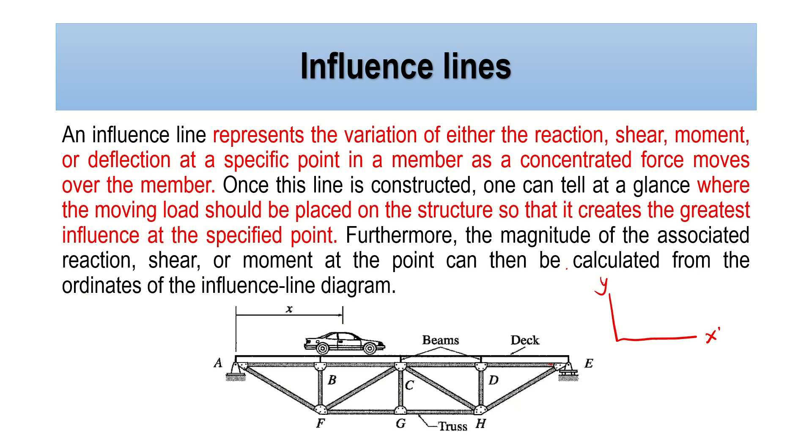Okay, so ngayon, sa influence line, ang pag-aaralan natin for this lecture is influence line for beams. Ang kukuhanin natin yung maximum reaction, shear, or moment, o influence line ng reaction, shear, and moment. And then for the influence line for trusses, influence line ng reaction, and influence line ng member forces.

Okay, so ngayon, ano ba dapat kailangan nating daanan, or what are the key principles behind influence line? Number one, in order to construct an influence line, place a one unit load at various locations to determine the reaction, shear, and moment at the desired position for the influence line.

And then number two, upward reactions are considered positive. So it means that if we have a downward reaction, that is considered negative. All influence lines for statically determinate beams will consist of straight line segments.

This is important because we can use this principle in order to determine other ordinates in our structure. Kasi since this is a straight line, ibig sabihin, kaya natin mag-produce ng similar triangle, also called ratio and proportion.

And then number four, refer to the image below for the directional sign convention for shear and moment when utilizing method of section. Ibig sabihin, kapag nag-method of section ka, kinat mo yung beam, kinonsider mo yung left side, your moment should be counterclockwise and then your shear ay downward. Kapag nag-cut ka naman, kinonsider mo yung right side, your moment should be clockwise and then your shear should be upward. Okay, so yun lang po yung principle.

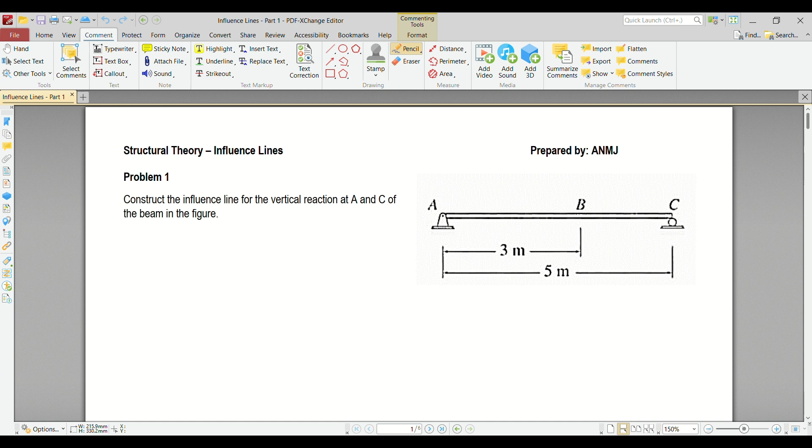First thing we need to do is, again, based on the concept presented earlier, we need to place a one unit load at various locations of the beam. Since meron nang mga point na nakalagay dito sa aking beam, doon na lang tayo maglalagay ng point, but you can cut the beam in different segments that you want. Okay, so ngayon, ang pinapahanap is reaction ng A tsaka reaction ng C. So ngayon, i-project lang natin yung different reaction nila. So we have here RA.

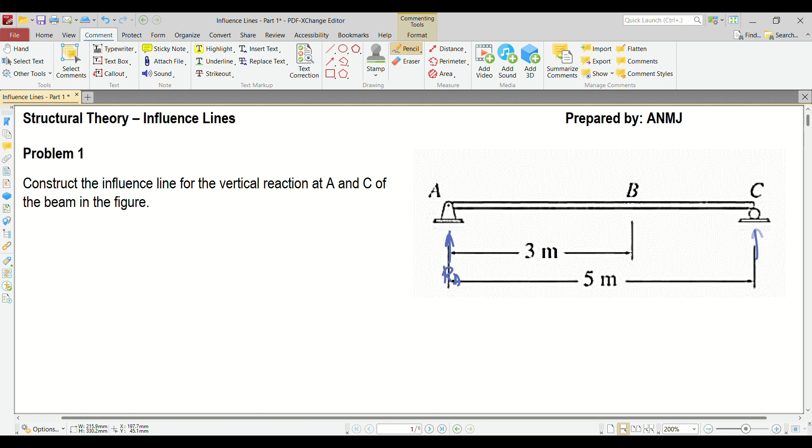And then, we also have here RC. So now, how do we solve this problem? So again, place one unit load at various locations. So let's say ito yung one unit load natin. Again, yung one unit load natin ay hindi stationary. Ito ay nagmo-move at various locations.

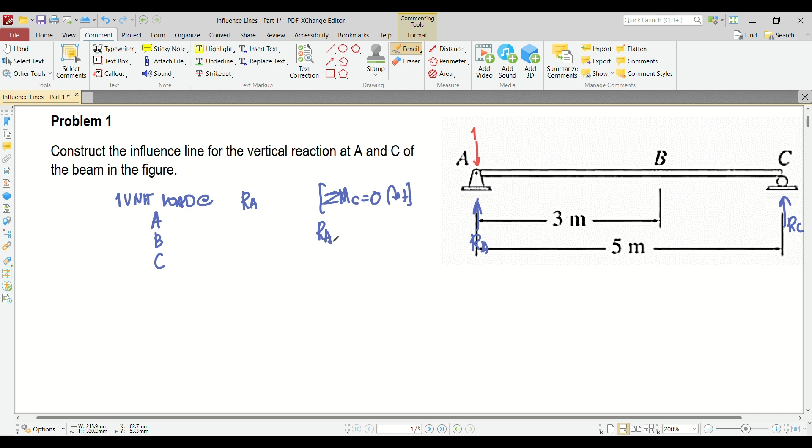So, basically, para makuha natin yung reaction sa A, pwede tayo mag-moment. So, summation moment sa C equals 0, clockwise positive. So, therefore, what will happen? So, we have RA, that is clockwise, so that is positive. The distance is 5. And then minus, kasi ito counterclockwise, 1 multiplied by 5 also equals 0. If you notice, yung RA natin is just equal to 1.0.

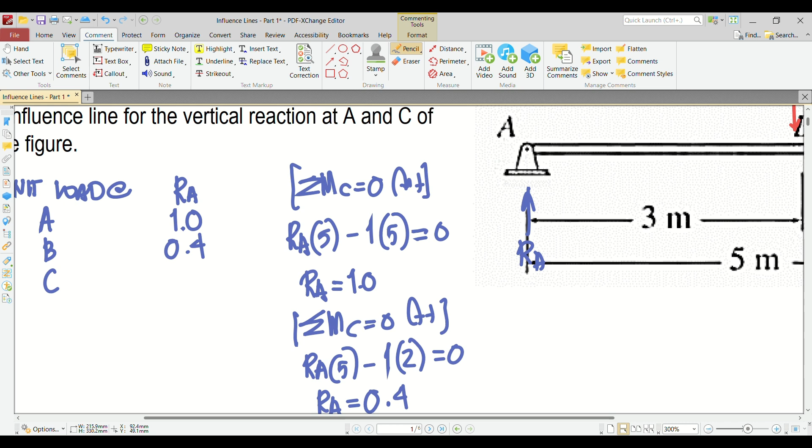Now, again, i-move natin yung 1 unit load, i-place natin sa point C. If the 1 unit load is placed at point C, what will be my reaction? Again, to determine the reaction, you can take the moment at point C. Summation moment sa C equals 0, clockwise positive. So, this is RA multiplied by 5, and then minus 1. Since we don't have any perpendicular distance from the 1 unit load to point C, kasi nasa point C na yung loading, our distance here should be equal to 0. So, RA should also be equivalent to 0.

So, ang influence line natin is yung mga ordinate 1.0, 0.4, and 0. So, using this, we can now create an influence line. Remember, the influence line for statically determinate beams consists of straight line segments. So, if we draw the influence line for reaction sa A, paano natin gagawin yan? First, let me draw the beam.

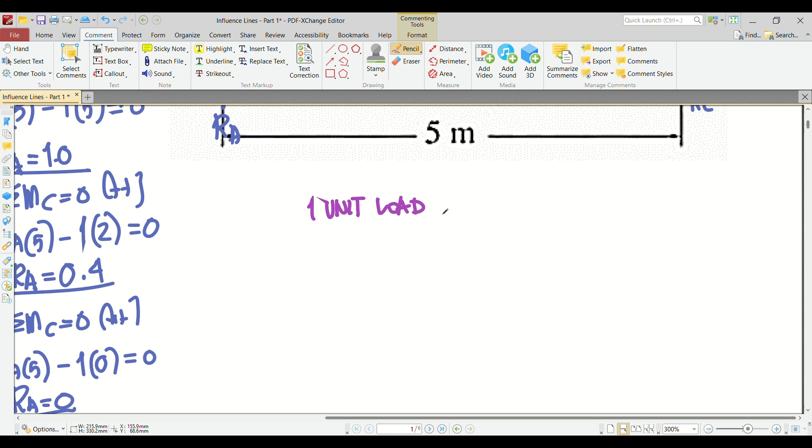Summation moment sa A equals 0, clockwise positive. So, therefore, what will happen? We have negative RC. If the 1 unit load is placed at point A, negative RC multiplied by 5, plus 1, but you don't have any distance kasi yung 1 unit load mo naka-place sa point A. So this is 0 equals 0. Zero divided by any number is equal to 0. So yung unang ordinate natin is 0.

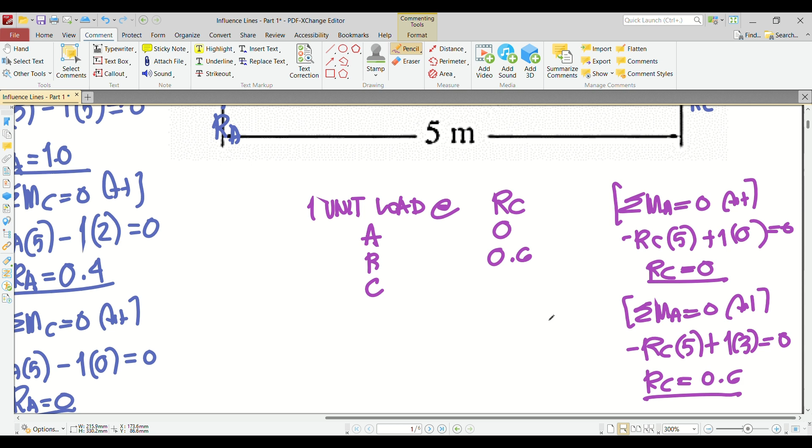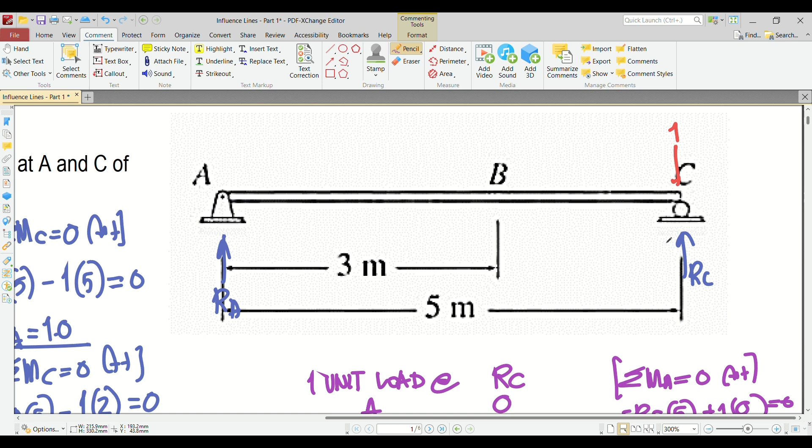Isin natin. 0.6. Now, if the 1 unit load is placed at point C, lagay natin. Ano na ngayon yung reaction ko sa C? So, ganun lang ulit. Summation moment sa A equals 0, clockwise, positive. So, therefore, this is negative RC times 5 plus 1 times 5. Bakit 5 na to? Bakit hindi na 3? Kasi nga, yung 1 unit load mo nasa point C na, which has 5 meter distance from point A. Kasi sa point A ka nagmo-moment. So, therefore, yung RC natin should be equivalent to 1.0. So, 1.0 pala ito.

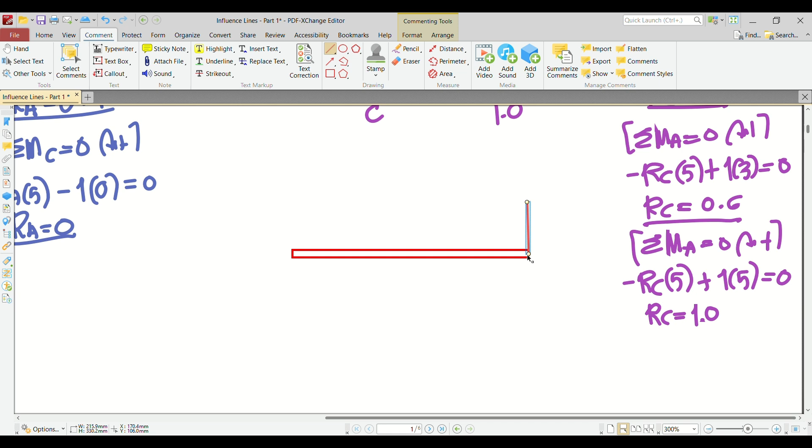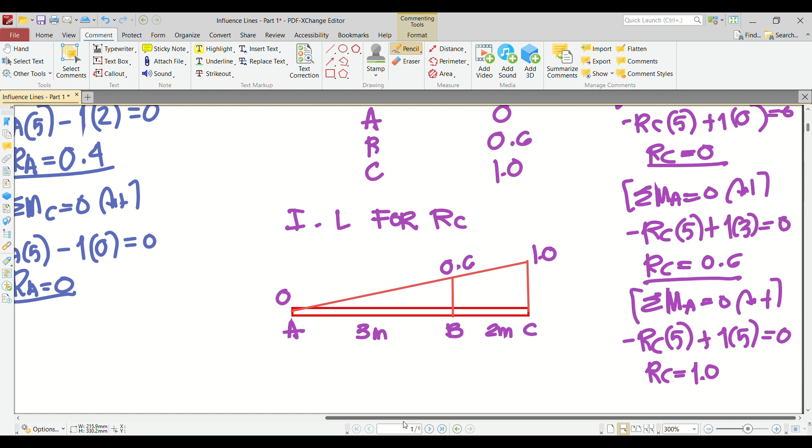Okay, so we can now create an influence line. So again, influence line consists of straight line segments. Kaya madali. So, drawing ko lang. Okay, so lagyan natin ng mga letters. So this is the influence line for reaction at C. So this is point A, this is point B, this is point C. The ordinate for this one is 1.0 based on our table here. And then sa B, this is 0.6 and then this is 0. So pwede naman natin lagyan ng horizontal distances. So ito ay 3 meters, ito ay 2 meters. So sa kabila din, lagyan natin 3 meters, ito ay 2 meters.

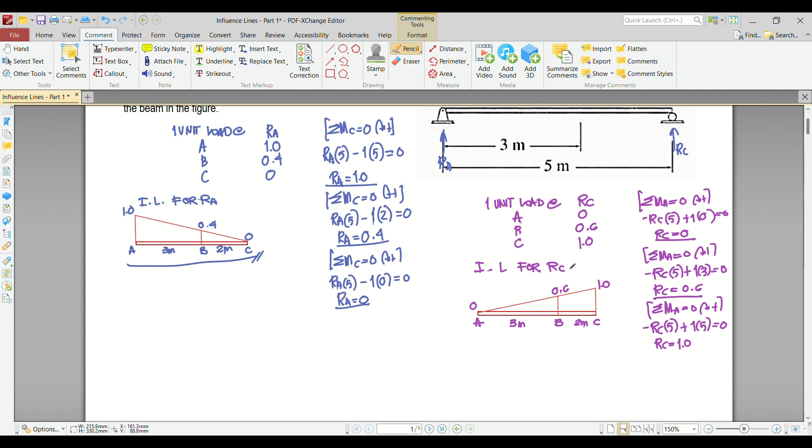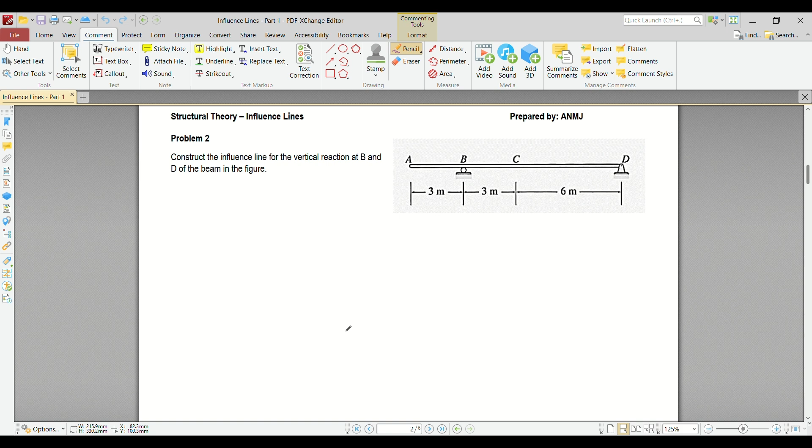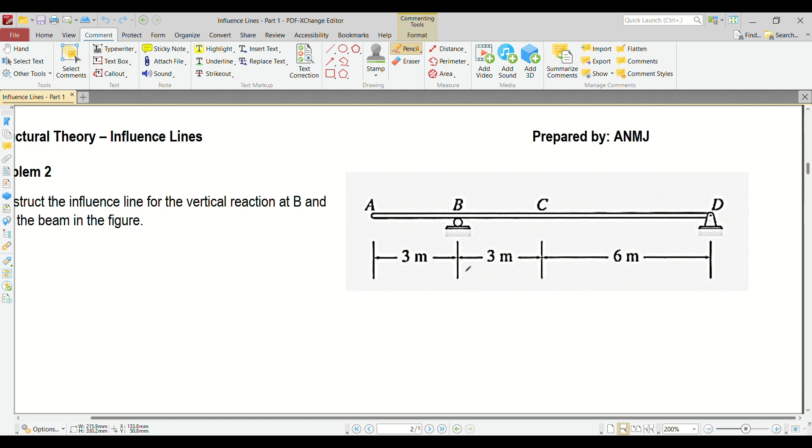So that's how you draw influence line based on the 1 unit load placement. Medyo mahaba lang but we do have shortcut for that, but that is for a different video. Okay, so let's try to answer problem number 2. Construct the influence line for the vertical reaction at B and D of the beam in the figure. So we have an overhanging beam. For this one, I will not place the 1 unit load at different places. This is just a representation. Alam nyo na dapat ilagay yung 1 unit load sa different placement. Again, this is just a representation that the 1 unit load is moving to the right.

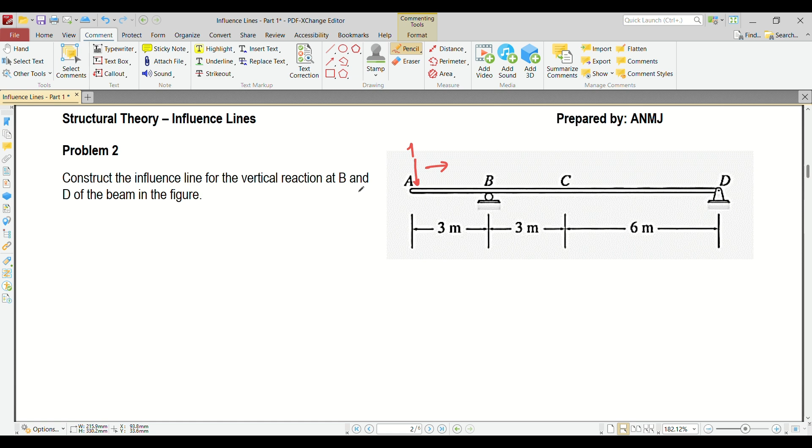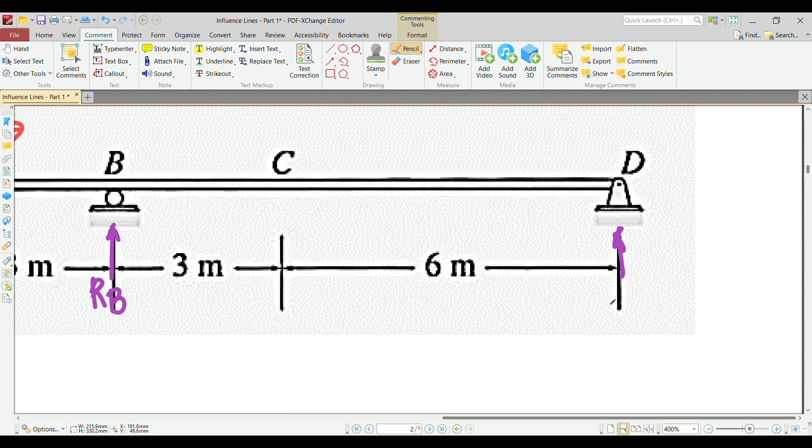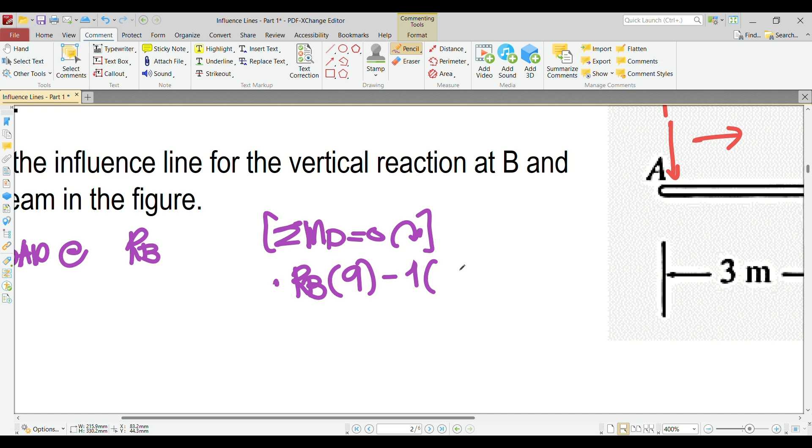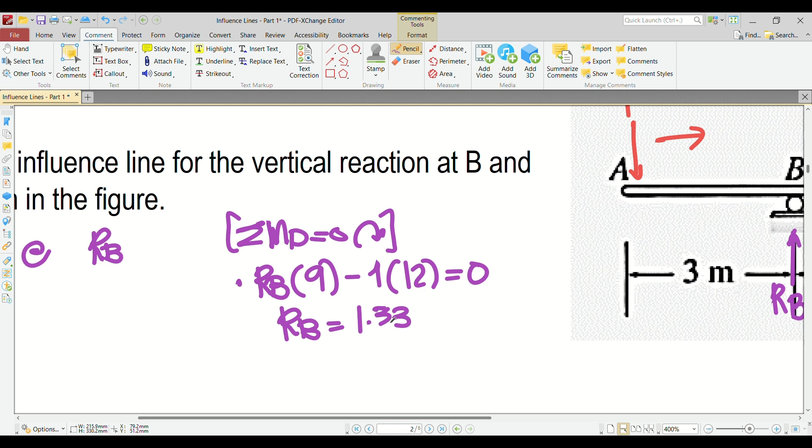So ngayon, na pinapahanap is reaction sa B tsaka reaction sa D. So let's write the representation of those reactions. So we have here RB, and then we have here RD. Gawa tayong table. A, B, C, and D. Unahin na natin si RB. Para makuha natin si RB, summation moment sa D equals 0. Remember, magsa-summation moment ka lang kung nasan yung support, at point B and D. So if the 1 unit load is placed at point A, tapos nag-moment ka sa D, we have RB, positive kasi clockwise, multiplied by 9, minus 1 multiplied by 12, equals 0. So yung RB natin should be equivalent to 1.33 or 4 over 3.

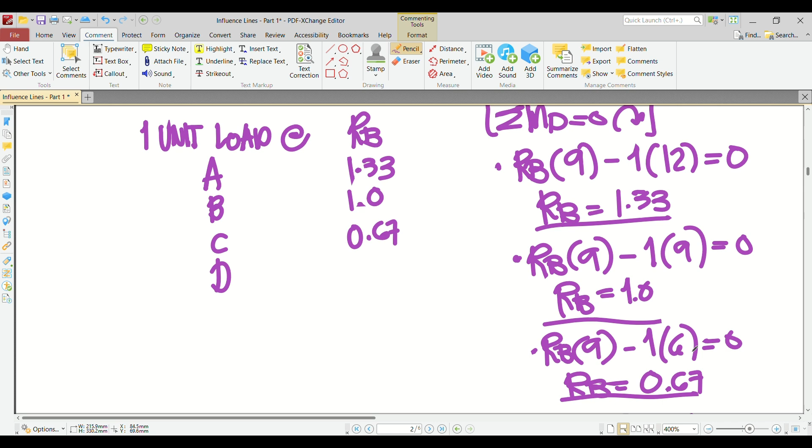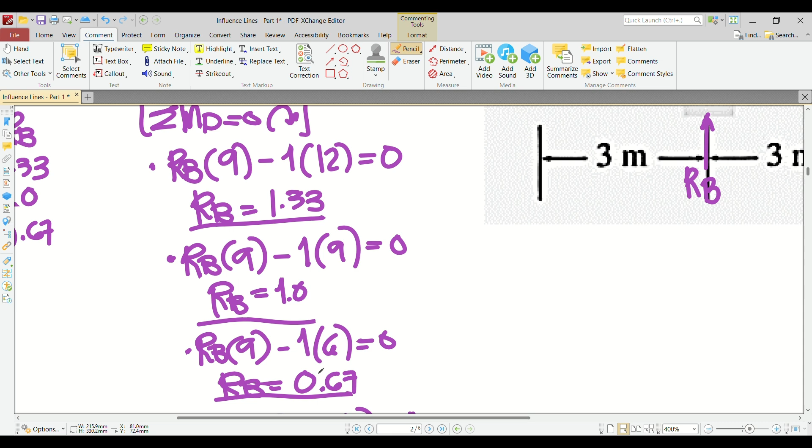Ngayon yung 1 unit load natin nasa point B na. RB times 9 minus 1 times 9 equals 0. So RB is 1.0. Next, yung 1 unit load natin nasa point C na, and ang distance ng point C from point D is 6 meters. So RB times 9 minus 1 times 6 equals 0. So RB should be equivalent to 2 over 3 or 0.67. And if the 1 unit load is placed at point D, RB times 9 minus 1 times 0, since walang distance, equals 0. So RB is 0.

So ngayon, anong next step? Next step is we need to draw the influence line for RB. Drawing ko lang.

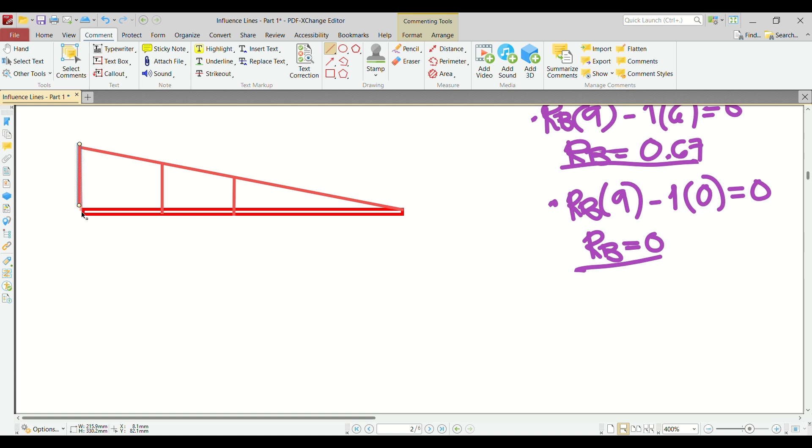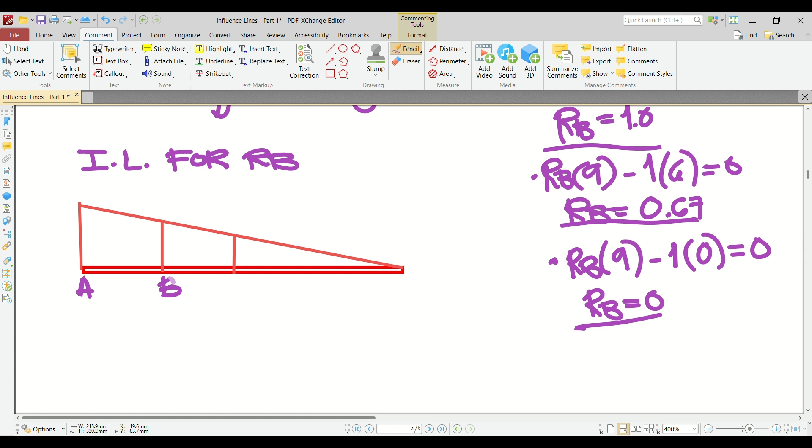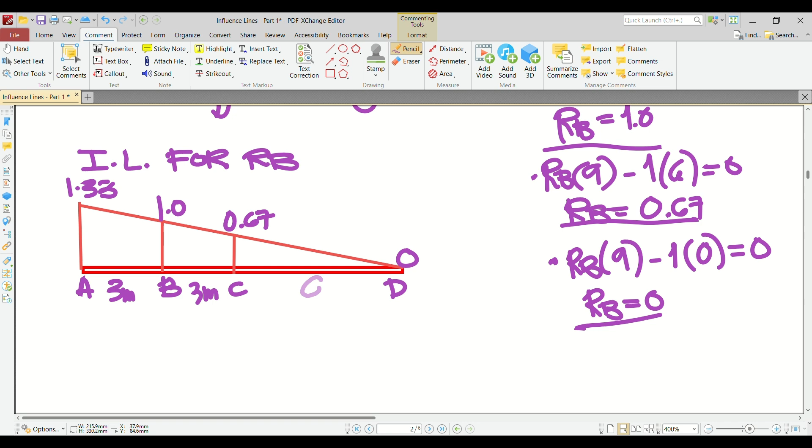Okay? So this is the influence line for the reaction at B. Okay? So this is point A, point B, point C, and then point D. So the ordinate for this one is 1.33 or 4/3. This one is 1.0. This one is 0.67 or 2/3. And then this one is 0. Okay? So let's write the horizontal distances. This is 3 meters, 3 meters, and then 6 meters. Okay? So that's how we draw the influence line with regards to the reaction at B.

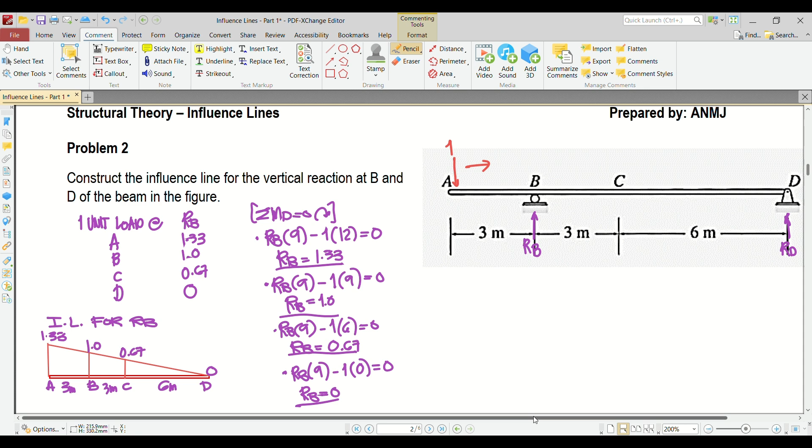Okay? So ngayon, let's try to solve the reaction at D. So ganun pa din. So lagyan lang natin ng 1 unit load. Point A, B, C, and D. Tapos hinahanap naman natin yung RD. Now, to determine the RD, so kailangan mag-moment sa B equal 0. Clockwise, positive. So, if the 1 unit load is placed at point A, tapos hinahanap mo si RD, so let's try to figure out.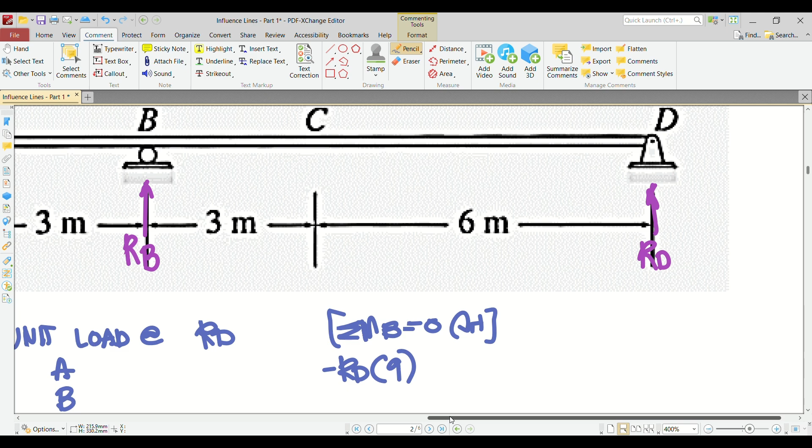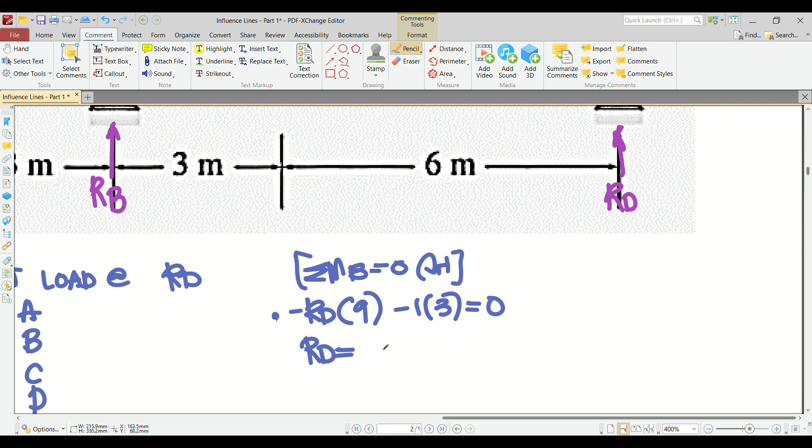So, paano yan? So, ngayon, yung movement ng RD natin is negative. The negative RD, bakit negative? Kasi moving counterclockwise siya from point B, no? So, negative RD times 9. And then, yung movement din ng 1 unit load natin, since it is placed at point A, so moving counterclockwise din siya sa point B. So therefore, minus din ito, minus 1 times 3 equals 0. So yung RD natin should be equivalent to negative 1/3. Okay? So yan muna.

Okay, another one. If the 1 unit load is placed at point B, so ano mangyayari? So negative RD times 9. Since it doesn't have any perpendicular distance kasi nagmo-moment ka sa B. So by the way, this is negative 1/3, no? Or 0.33 na lang. Since nagmo-moment ka sa B, tas yung 1 unit load mo nasa point B, so wala kang perpendicular distance. So ito ay 0. So RD is equivalent to 0. Okay?

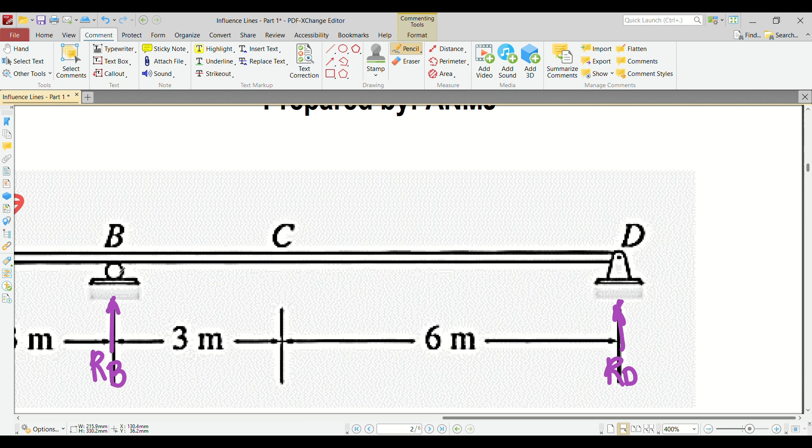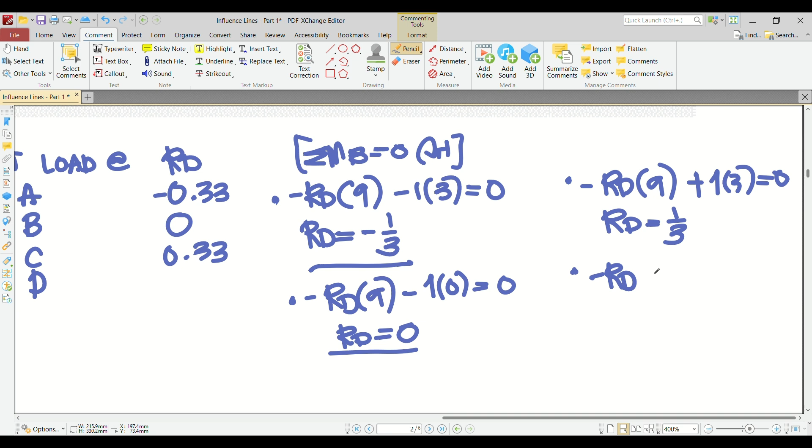Ngayon, another one, if the 1 unit load is placed at point C, so negative RD ulit, ito naman hindi nagbabago, no? And then, plus ka na ngayon. Bakit plus? Kasi this now is moving clockwise from point B. And it has a distance of 3. So 1 times 3 equals 0. So yung RD natin should be equivalent to 1/3 or 0.33. And then finally, if the 1 unit load is placed at point D, so negative RD times 9 plus 1 times 9 equals 0. So yung RD natin should be equivalent to 1. Okay?

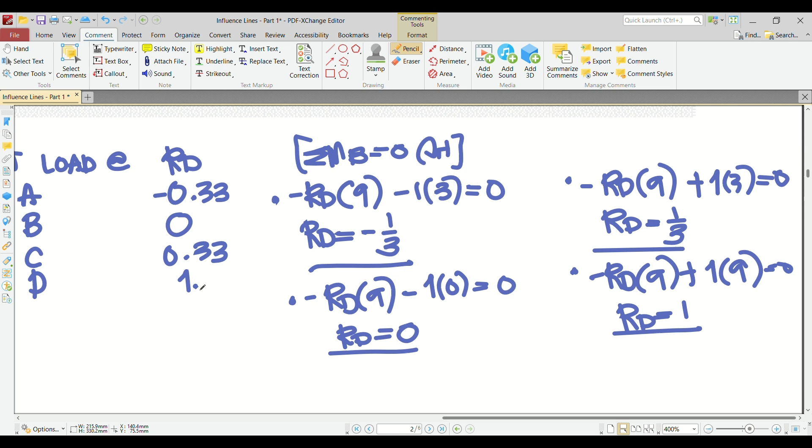So ngayon, let's draw the influence line. So this is the influence line for the reaction at D. Okay?

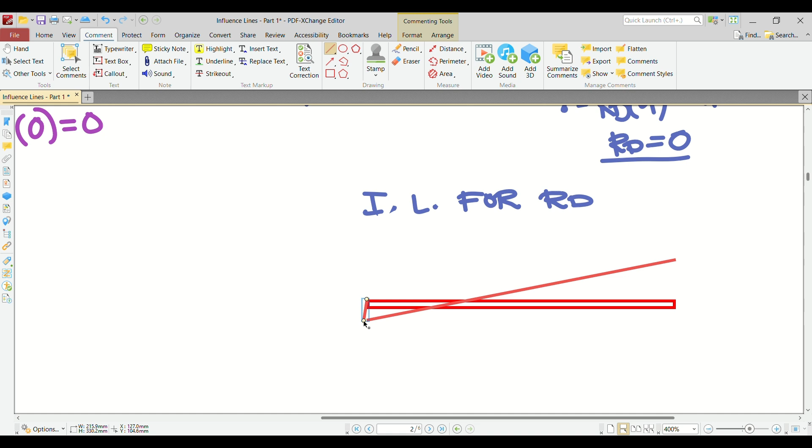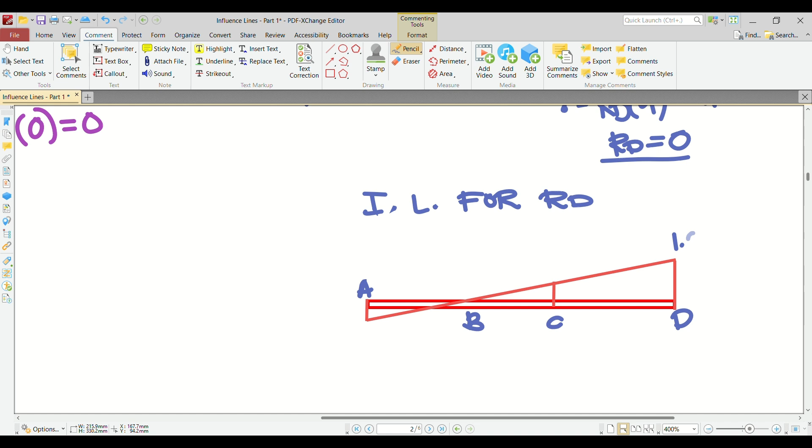Okay, so let's label the letters. So we have here point A, point B, point C, and then point D. So let's write the ordinates. So this is 1.0, this is 0.33 or 1/3. This is negative 0.33, and then this is 0. So horizontal distances, 3 meters, this is 3 meters, this is 6 meters. So this is already your answer for the influence line for the reaction at D. Okay? So that's how we answer problem number 2.

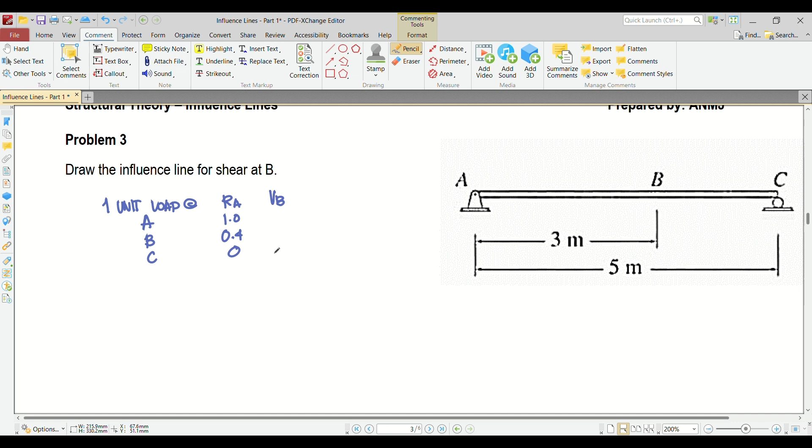Okay, so let's try to answer problem number 3. So it says here that we need to draw the influence line for shear at B. So ang gagawin natin, in order for us to determine the influence line for shear at B, kailangan natin ng reaction sa A kasi kailangan natin mag-cut sa point B in order to determine the shear. You can consider left side or right side, but for this one, I just consider the left side para medyo mas familiar tayo, no? Okay? So, again, I already incorporated the 1 unit load and the reaction at A. This is based on the ones that we solved earlier, no?

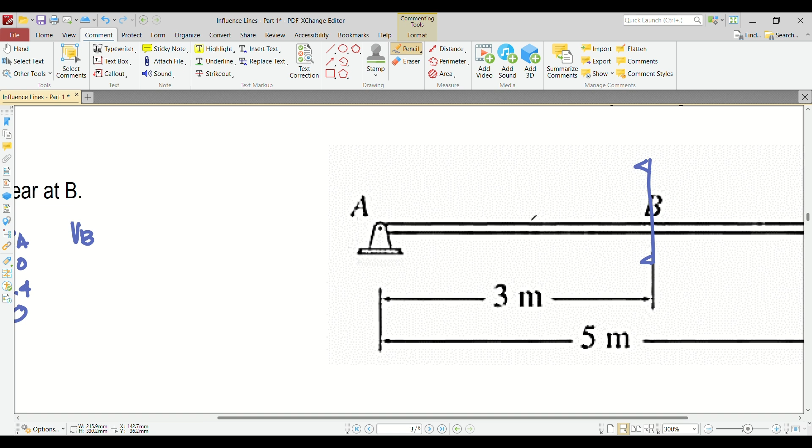Okay? So, ang gagawin ko, ika-cut natin, no? Cut ko dito, tapos consider natin yung left side. Kapag consider natin yung left side, ganito makikita natin, no? Okay. So, ang sabi natin, kapag nag-cut ka, tapos kinonsider mo yung left side, the direction of your shear should be downward. Okay? So, yan yung ating shear, no? So, ngayon, meron tayong pin dito that contains the reaction at point A. Okay? So, tapos, maglalagay tayong 1 unit load. Remember, this 1 unit load is moving. It is not stationary, no? Yan yung influence line natin or pag-create ng influence line natin.

Okay? So, the distance here is 3 meters. So, lagay ko lang, meters. Okay, so let's try to solve. So ngayon, if the 1 unit load is placed at point A, so ibig sabihin yung 1 unit load mo nandito. So lagay ko lang pero buuin ko rin. Again, it is just a representation. So what is your value for the shear at point B? So ngayon, summation forces vertical lang yan. Or, in my case, ang ginagawa ko, kapag opposite doon sa direction ng VB ko, so remember, ang direction nito downward. Kapag opposite sa direction nito, positive. Kapag same direction, negative.

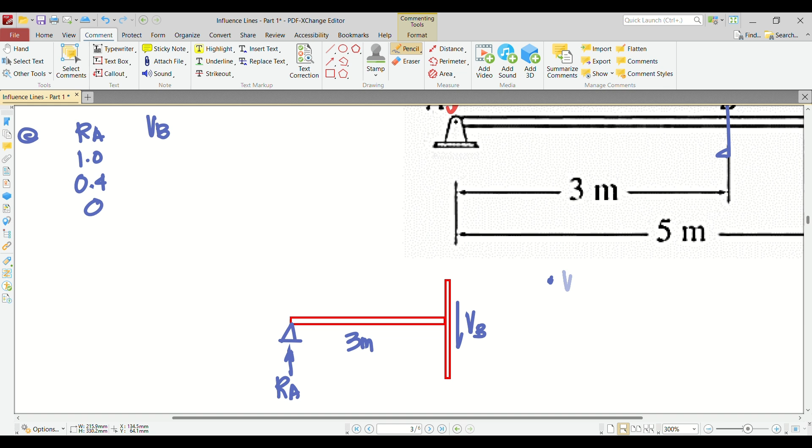Okay, ang opposite direction is yung RA. So bali magiging 1.0, again based on the reaction at A ito ha. Based on the reaction at A, and then minus 1.0 based on 1 unit load. Okay? So ngayon, yan lang naman yung dalawang force present if we cut the beam and then consider the left side. So ngayon, ang VB ko should be equivalent to 0 dahil doon sa dalawang to. Kasi 1 minus 1 is equals to 0. So yung VB ko pala dito is 0.

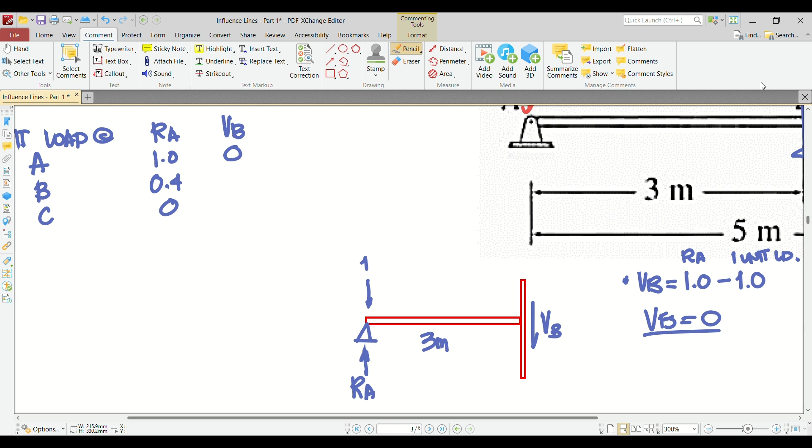Okay? Ngayon, if the 1 unit load is placed at point B, so remember, this is point A, ha? This is point B. So nandito na yung 1 unit load natin. So burahin ko lang. Nandito. Ngayon, kapag nandyan yung 1 unit load mo, may dalawa kang senaryo. So meron kang VB left, tsaka VB right. So paano ba yan? Anong ibig sabihin ng VB left, tsaka VB right? So ganito kasi, kunyari ito yung point B mo. So gawa tayong isang maliit na point. So nandito yung point B mo.

Tapos, if the 1 unit load is placed to the left of point B, ibig sabihin kapag nag-cut ka sa point B, i-consider mo pa yung 1 unit load. It's just to the left eh. VB left ang ino-consider mo eh. Ngayon, if the 1 unit load is lumagpas na ng konting-konti lang, no? It is just to the right of point B. You will not consider the 1 unit load anymore. Kasi lagpas na. Dito ka nag-cut eh. Lagpas na sa point B. So, you will not consider that anymore. Okay? So, ito, based on VB left, ito, based on VB right. Dalawang calculation gagawin mo dyan.

Okay? So, let's try. So, ngayon, again, opposite direction positive, same direction negative. Considering VB left, again, meron kang RA. Remember, if the 1 unit load is placed at point B, your reaction now is 0.4. So, bali mangyayari, 0.4. So, that's positive kasi opposite direction, minus 1.0. Remember, you need to include the 1.0 pa kasi nga, it's just to the left of point B. Okay? So, yung VB left natin should be equivalent to negative 0.6. Ngayon, paano naman yung VB right?

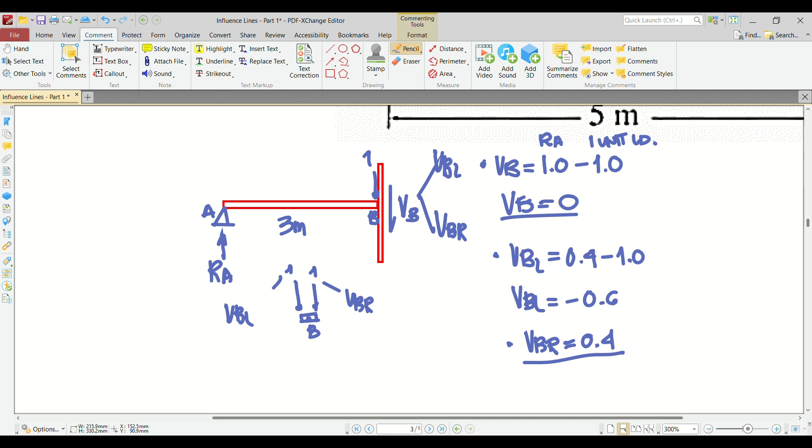O, lagay natin, VB right is equals to, so remember, opposite direction pa din si RA. So, lagay pa rin natin, 0.4. Now, we will not consider anymore the 1.0 since it is just to the right of point B. Kapag nag-cut ka, nasa right ng point B, hindi na yan kasama. Okay? So, the ordinate for VB right is 0.4. So, kapag nilagay natin yan dito, dalawa din. So, that is negative 0.6, considering VB left. Ito, positive 0.4. Dapat pag pinag-add mo yan, lagi yan equal to 1.

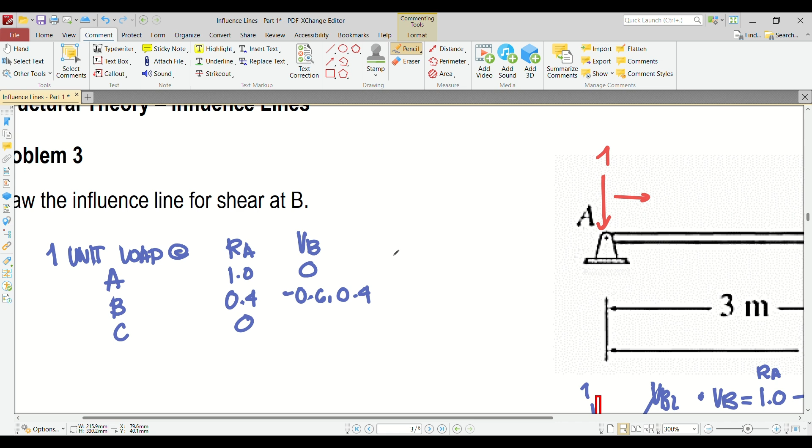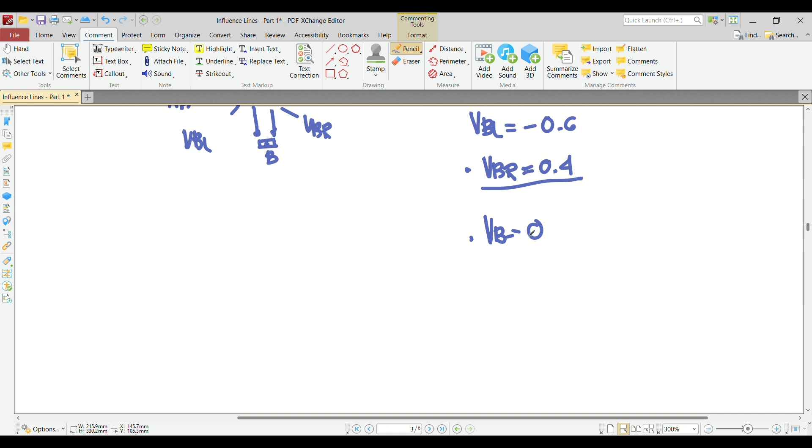Okay? So, ngayon, if the 1 unit load naman is placed at point C, so remember, our reaction is 0. So, therefore, kung wala tayong reaction, edi wala din tayong force. So, yung VB natin should be equivalent to 0. Okay? So, 0 pala ito. So, ngayon, ano next step natin? Next step is we need to draw the influence line. So, influence line for shear at B. So, let me draw first the beam. So, mangyayari, negative 0.6.

So this is 5 meters. This is, I think, this is 3 meters. This is 2 meters. This is point A, point B, and point C. This is negative 0.6. This is 0.4. And then, of course, these two are 0. So this is now your influence line for the shear at point B. Okay? So that's how we solve problem number 3.

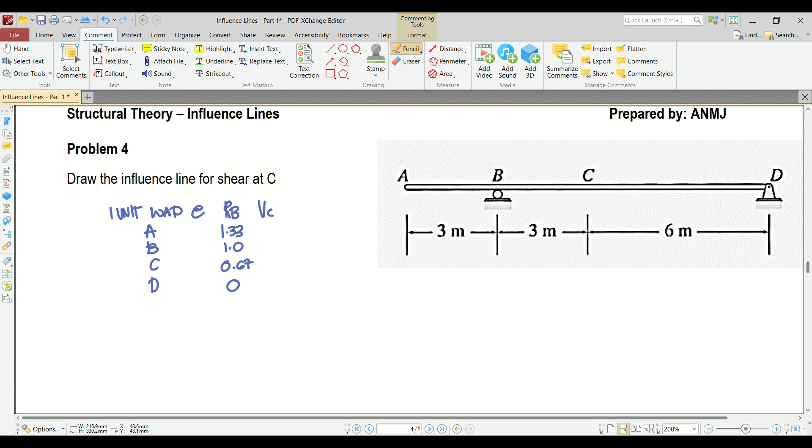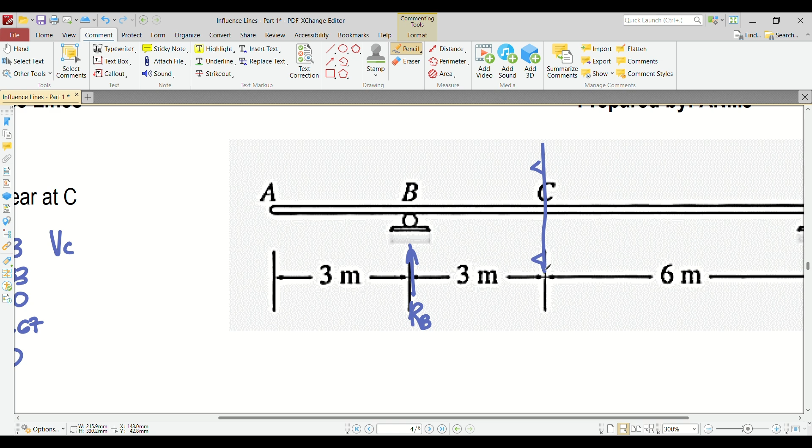Okay, so let's try to answer problem number 4. So sabi dito, draw the influence line for shear at point C. So again, ganun lang din ginawa ko. Meron na ako ditong 1 unit load at point A, B, C, and D. Tapos, naglagay na rin ako ng reaction nila. Again, this has been solved based on previous problem, no? Na-solve na natin yan. So ngayon, i-represent ko lang dito yan, ha? So we have here RB. Again, since we consider RB as our reaction, so ibig sabihin, kino-consider ko na pag nag-cut ako, yung left side yung kukuhanin natin. Okay? So again, drawing ko muna.

Okay, nag-cut na tayo. Tapos lagay natin yung RB. This distance is 3 meters. This is 3 meters. Again, if we consider the left side, the direction of your shear should be downward. Okay? So ngayon, if the 1 unit load is placed at point A, remember this is point A, B, and C. If the 1 unit load is placed at point A, ibig sabihin nandito, kapag nandyan yung 1 unit load, ay reaction is 1.33. So therefore, opposite direction, positive, same direction, negative.

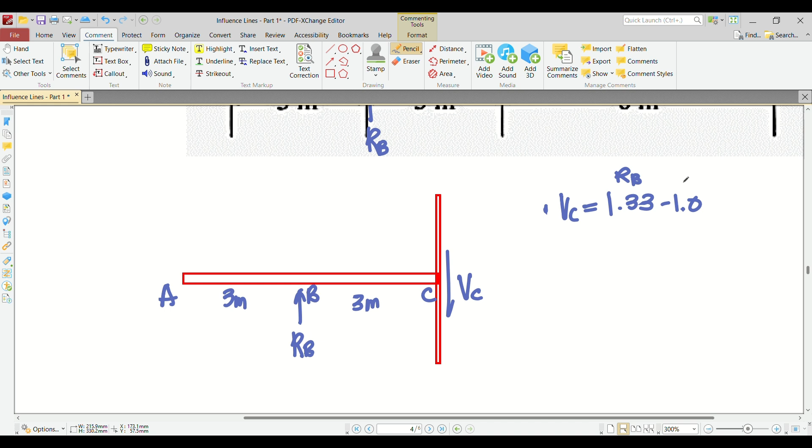So yung VC ko is equivalent to 1.33 minus 1.0. Again, this is based on the reaction at B. This is based on 1 unit loading. Okay? So ngayon, yung VC ko pala is equals to 0.33. Positive. Okay? So lagay natin dito.

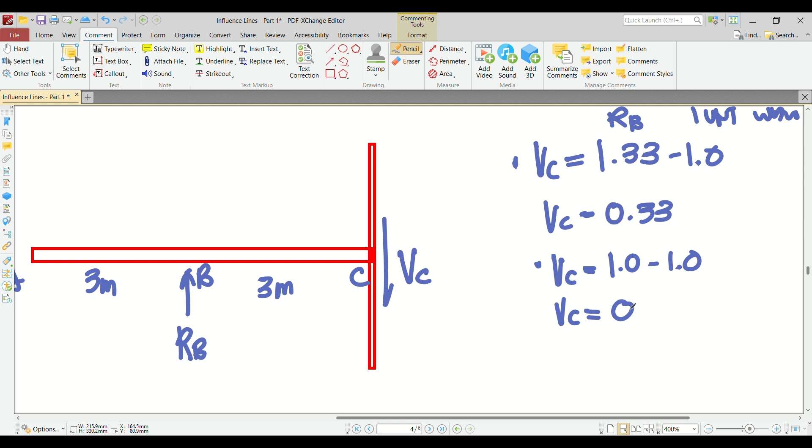Okay? If the 1 unit load now is placed at point B, so my reaction is equivalent to 1.0. Opposite direction, so that's positive, no? So 1.0 and then minus 1.0 courtesy of the 1 unit load which is placed at point B. So therefore, yung VC ko pala dito is equivalent to 0. So lagay natin. Okay? So dito na magkakaroon ng V left tsaka V right. Okay? So i-project natin.

VCL, ito VCR. Again, yung VCL is the 1 unit load is just to the left of, sulat ko na nga, para hindi malito. So ito yung C. Again, sa present lang to kapag shear. Pag moment, wala po ito. So this is V, this is based on VCL. This is based on VCR.

Okay? So VCL, you need to consider the 1 unit load still, but what is the value of our reaction? If the 1 unit load is placed at point C, our reaction is 0.67. So ngayon, ano mangyayari? So positive 0.67 and then minus 1.0. Remember, this is based on the 1 unit load. You need to consider still because it is on the left side of point C. So ngayon yung VCL ko should be equivalent to negative 0.33.

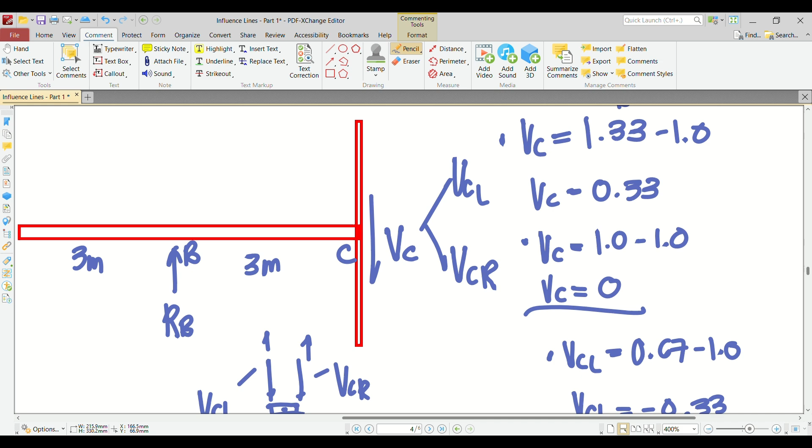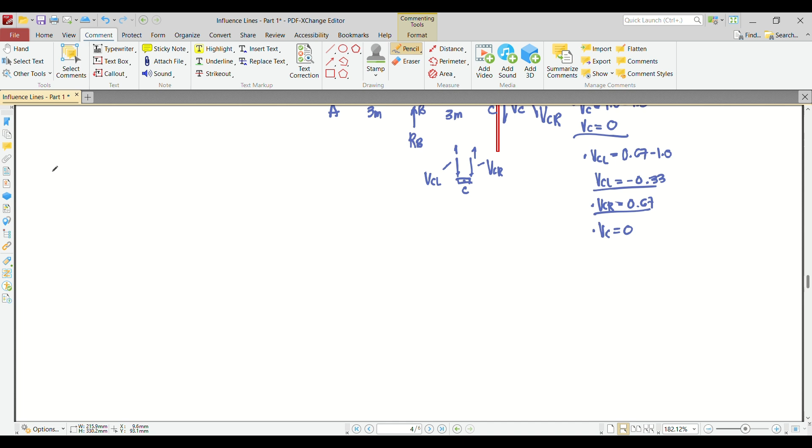Okay? How about VCR? So, yung VCR ko should be equivalent to 0.67 lang. Wala na yung 1.0 kasi lumagpas na nung point C. Okay? So, ito yung mga values natin. And then, finally, if the 1 unit load is placed at point D, our reaction is 0. So, therefore, yung VC natin should be equivalent also to 0 because we don't have any loading present in our beam. Okay? So, lagay natin dito, negative 0.33, and then this one is 0.67, positive, and then 0.

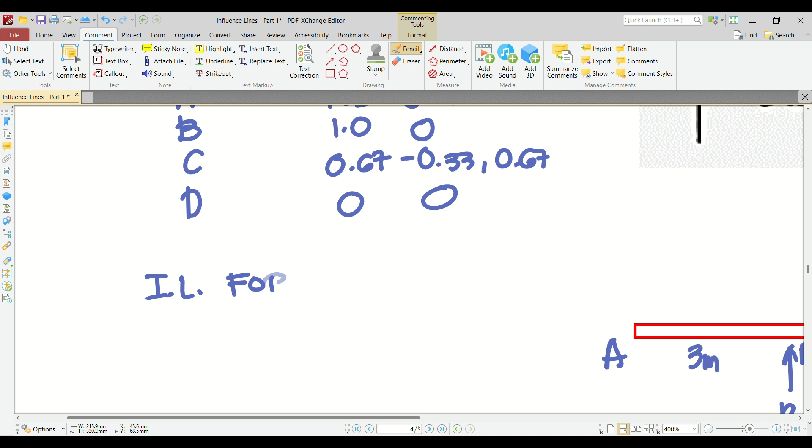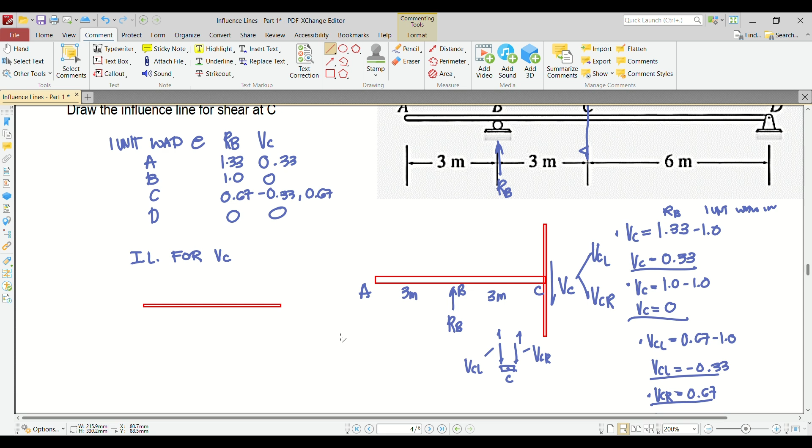So, now, let's draw the influence line for shear at point C. Drawing ko muna. So, positive, tapos negative, another positive.

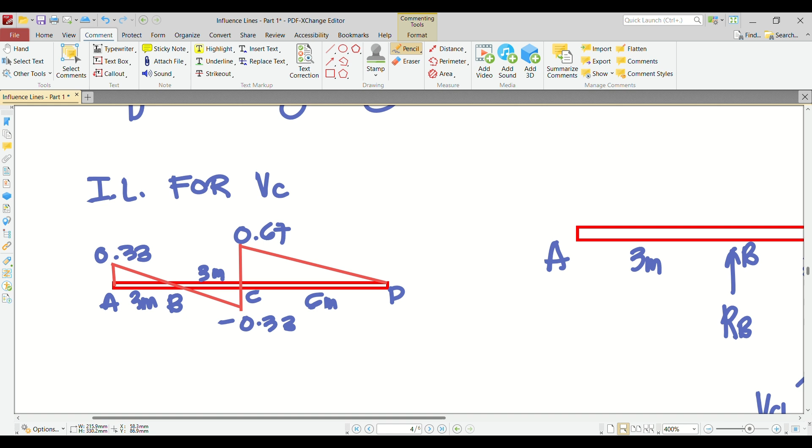Okay, so let's write the letters. So we have here point A, this is point B, C, and then D. Horizontal distance, this is 6 meters, 3 meters, and then another 3 meters. This is 0.33. This is negative 0.33. This is positive 0.67, and then the others is 0. So this is now the influence line for the shear at point C.

Again, for now, hindi pa natin alam kung anong meaning ng mga influence line na yan. So, don't worry, we will tackle it once we get there, no? Kapag meron na tayong mga loading na present, moving loads na present. No? But for now, that is our influence line for shear at point C. For this problem, problem number 4. Okay?

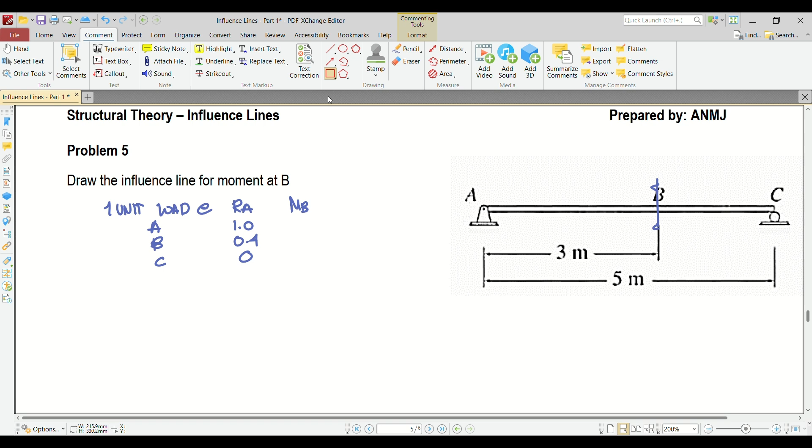Okay, tapos we do have reaction here, RA, that has a distance of 3 meters. Ngayon, kapag nag-cut ka, kinonsider mo yung left side, the direction of your moment should be counterclockwise. So, yan, MB. So, ngayon class, walang MB left dito, tsaka MB right. So, kasi wala naman siyang perpendicular distance, no? So, 0 lang, doesn't matter, no? So, kaya, hindi na natin i-consider yun. Tuloy-tuloy lang tayo, mas madali ito, no?

Okay? So, if the 1 unit load is placed at point A, so ibig sabihin nandito yung 1 unit load, our reaction for A is 1. So, what is the value for MB? So, ganun pa din, opposite direction positive, same direction negative, since it is moving counterclockwise. So, yung RA ko is moving clockwise, no? Kapag ganun yung scenario, ibig sabihin positive si RA. Kasi opposite direction sa MB, no?

So, therefore, RA ko is 1, perpendicular distance ko is 3, minus 1. Saan galing to? Yung 1 unit load na place dito. Okay? So, times 3 also. Again, this is based on reaction sa A. This is based on 1 unit loading. Okay? So, yung MB ko should be equivalent to 0. So, 0 pala ito. Okay? So, another one, if the 1 unit load is placed at point B, my reaction is 0.4. So, therefore, positive ulit yung reaction, 0.4, hindi nagbabago yung perpendicular distance, 3 pa din.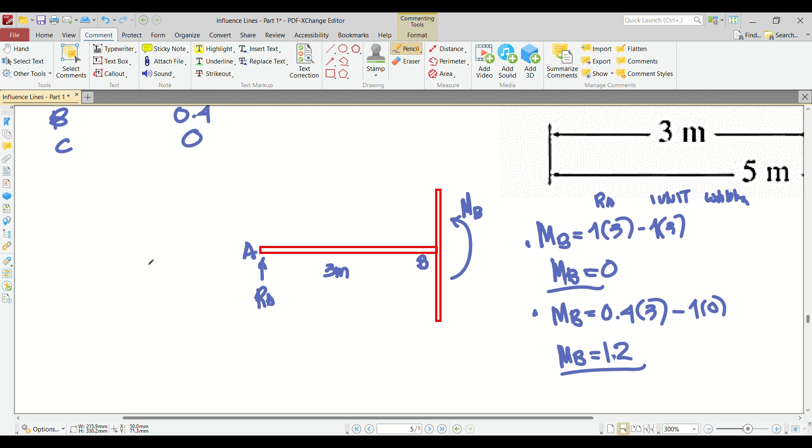Ngayon, yung 1 unit load natin, walang distance. So minus 1 times 0, kasi yung 1 unit load mo nasa point B, wala na siyang distance. So therefore, yung MB mo should be equivalent to 0.4 times 3, I think that's 1.2. So correct, that is 1.2, ibig sabihin pala ito pala ay 1.2.

Now, if the 1 unit load is placed at point C, remember, you don't have any reaction, at lumagpas na si 1 unit load mo kasi nasa point C na. So yung value ng MB mo lang dyan is equivalent to 0. So 0 lang pala ito.

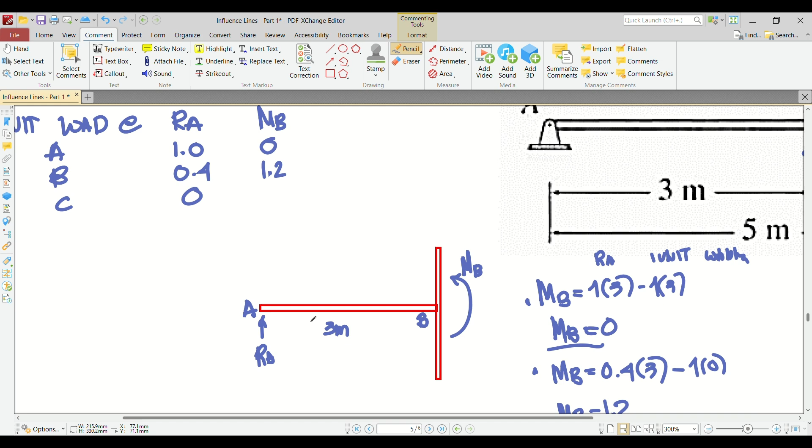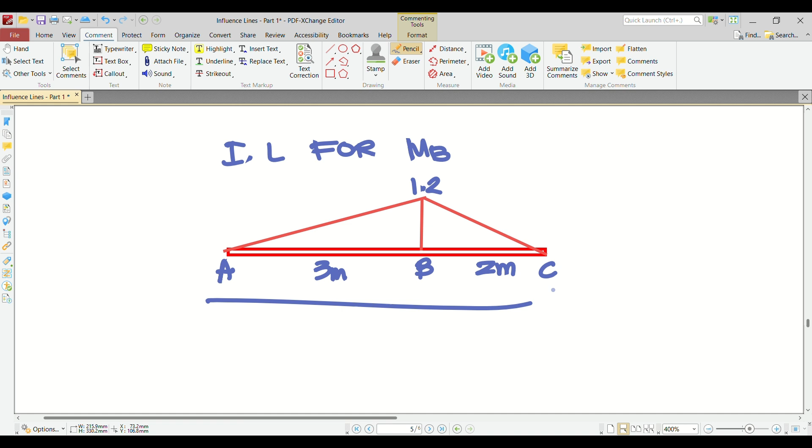Okay, so ngayon, let me plot na the influence line for the moment at point B. So this is now point A, point B, and then point C. So this is 1.2, this is 3 meters, this is 2 meters. So this is now your answer for problem number 5.

Okay, madali lang, no? Okay?

Okay, so let's try to answer problem number 6. So this is now the last problem for our part 1 of the influence line. This is the long method of the influence line. May mas madali dito, pero gusto ko lang ituro to para magkaroon kayo ng foundation. If you forgot the long method, the short method, so you can always go back to the long method, or which is the principle, kung saan nanggaling yung principle.

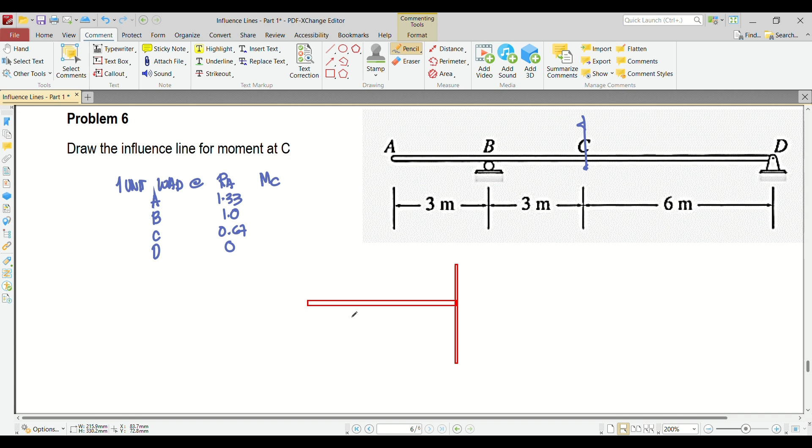Okay, so ngayon, since I consider here RA, ibig sabihin kinonsider ko yung left side ng cutting plane. Kapag left side yung kinonsider natin, so i-cut natin dito. Then consider the left side. So ngayon, i-drawing ko lang yung cutting plane, no? So this is the reaction at B. So again, kapag kinonsider mo yung left side, wait lang, lagyan muna natin ng mga distances. Kapag kinonsider mo yung left side, your moment should be counterclockwise. So this is point A, B, C, and then this is MC.

Okay, so if the 1 unit load is placed at point A, ibig sabihin nandito yung 1 unit load mo, no? So my reaction is 1.33. So ngayon, opposite direction, positive, same direction, negative. Opposite reaction yung moment, so therefore this is 1.33 multiplied by the distance, so this is 3 minus 1. Since same direction yung 1 unit load na nandito, so 1 times 6 equals, so ilang kaya itong MC natin? So 1.33 times 3 minus 1 times 6. So ang lumalabas sa akin is 2, negative 2.

Okay, so yun yung una natin. So if the 1 unit load is placed at point B, so ano mangyayari? Our reaction is 1, so 1 times 3. 1.33, this is based on the reaction again, kasi opposite direction sa MC. Pag ano yung RB, so ngayon, minus 1 times 3. Sorry, hindi 1.33, that is 1. So based on the reaction, so 1 times 3. Ito, based on the loading, same direction, so that should be negative, no? So negative 1 times 3. So ilan kaya yung MC natin? MC natin should be equivalent to 0.

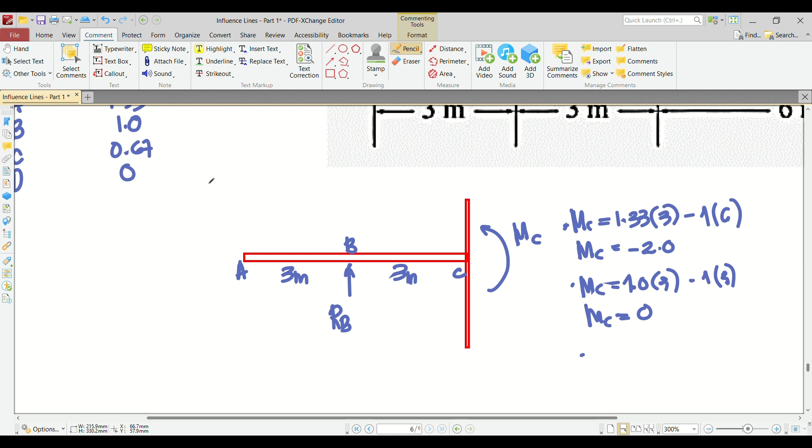Okay, so if the 1 unit load is placed at point C, so my reaction is 0.67 na positive, no? So ngayon, anong mangyayari? So 0.67 times 3. Kung wala ka ng 1 unit load kasi nasa point C na, it doesn't have any perpendicular distance. So therefore, yung MC ko should be equivalent to, bari 2, ilan to? 0.67 times 3, so that is 2.0.

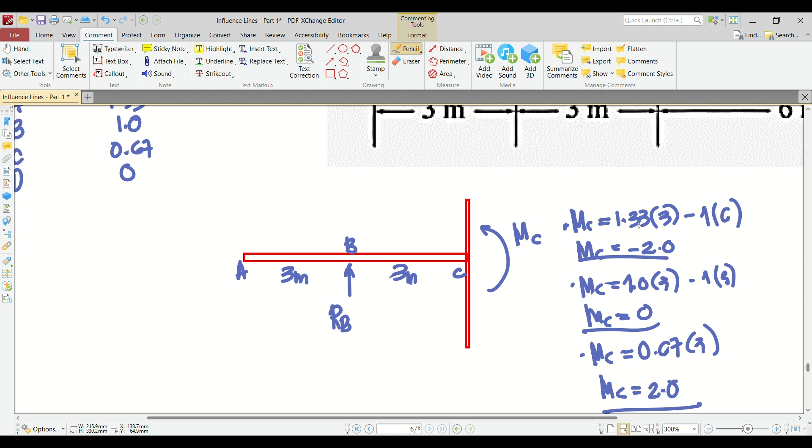Okay, now if the 1 unit load is placed at point D, so wala kang reaction, so therefore yung MC mo is just equal to 0. So ilagay na natin yan. So we have here negative 2, this is 0, this is 2.0, then this is 0. So the influence line drawing natin for the moment at point C.

Okay, so lagay natin yung horizontal distances. So this is 3 meters, and then this is 3 meters, this is 6 meters. So this is point A, point B, point C, and then point D. So let's write the ordinates. So we have here 2.0, and then this is negative 2.0. So this is now the influence line for the moment at point C.

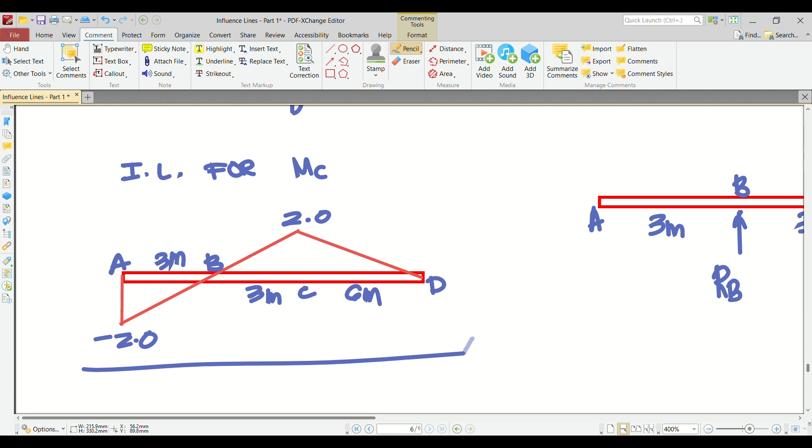Okay, so that ends our part 1 for the lecture for the influence line. So my next topic or next video, so I will discuss the shortcut method or the Müller-Breslau method in order to determine the coordinate and the shape of the influence line based on beams. Okay, so see you on the next video.